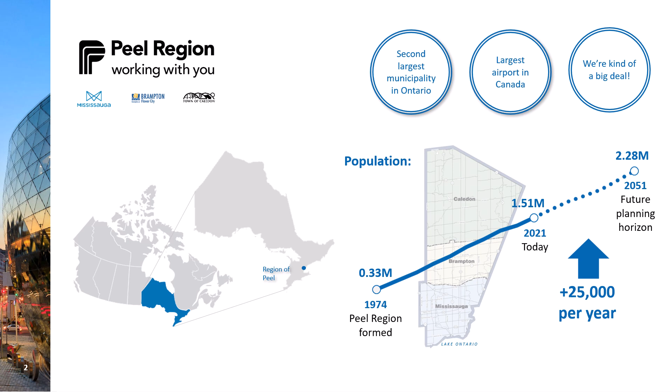This presentation looks at some trends and insights gained from monitoring wastewater within the sewer network. This study was performed within Peel region. This is an upper-tier municipality encompassing 3 cities, Brampton, Caledon, and Mississauga, for a total population of 1.5 million people. Our famous neighbor immediately to the east is the city of Toronto.

The presentation has 3 parts: introduction to sewers and sewer monitoring, a review of trends and insights, and it concludes with the next steps.

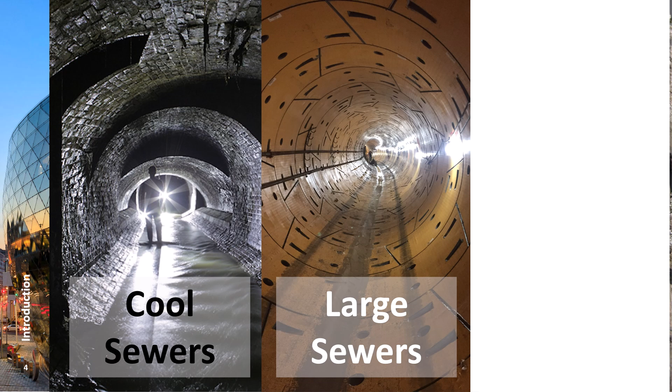There are cool sewers that you see in the cartoons and Walt Disney movies. Then there are really large sewers like the one in the middle of the screen. But the truth is that most sewers are small and unglorified. If there's one thing that you take away from the presentation, it is that for the sake of sewage heat recovery, only large sewers count, not the rest. And large means anything bigger than 650 millimeters in diameter.

Sewer networks are very much like a tree, where your home is just a leaf connected to a small branch. Small branches come together and make bigger branches that lead to the trunk. Sewers are just like the branches. They change in size, and the bigger ones are referred to as the trunk. Sewers are also like one-way streets. Flow only goes downhill, or at least that's the intention.

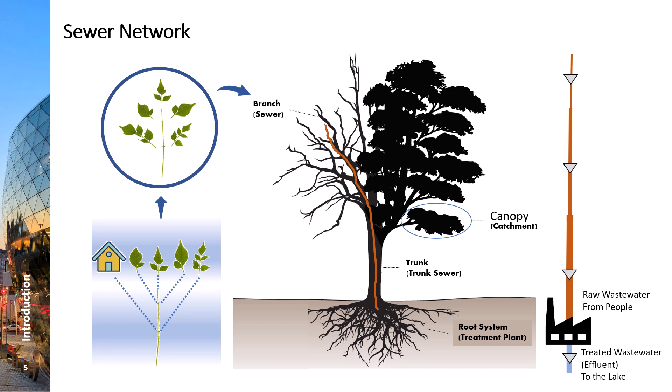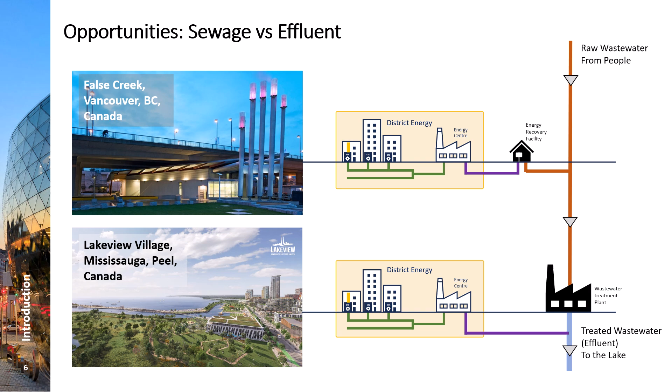We are monitoring depth, velocity, flow rate, as well as temperature of sewage within our network at over 400 locations. This involves descending into the sewer and installing equipment, and then maintaining it on a regular basis. This is quite a shit show, quite literally. Things break all the time and go wrong all the time. That's why this initiative, the monitoring, costs more than $4 million every year. However, the data collected enables us to operate the network very efficiently. We use it for all different purposes.

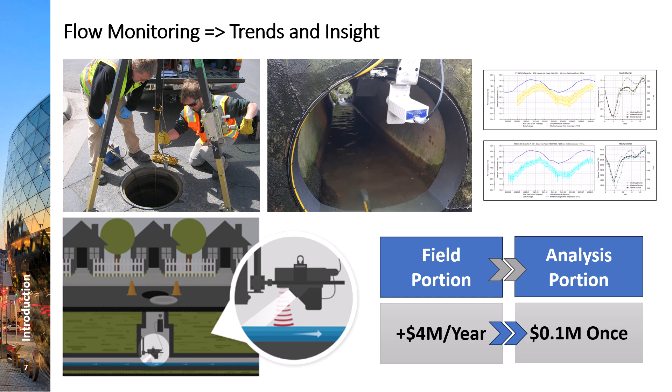All I'm going to explain on the temperature side of analyzing the data has been done 100 times over for other parameters. This is our first attempt at looking at the temperature side. This study isn't the expensive part, it's the monitoring portion that is very hard and costly.

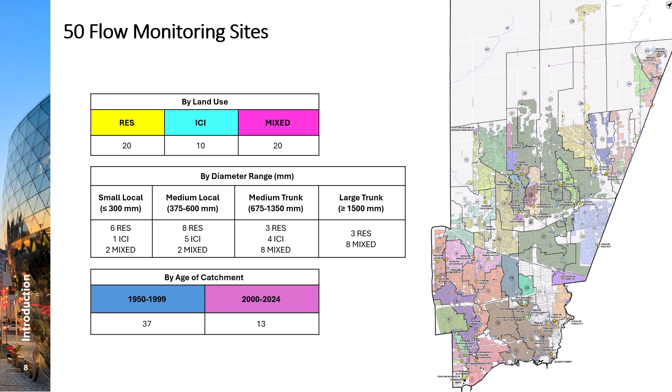50 monitoring locations were selected for this study. Care was given to pick locations from different land uses, different pipe sizes, and different vintage ages. This allows us to slice the data by, for example, land type, and then see if there's a correlation between residential neighborhoods and the size of the pipe, and so on.

It is evident that this type of work requires professionals who are both very smart and dedicated. Kristen, Ashley, and Dave have done the work; I only dream of the project and they make it a reality. They deserve all the credit here.

The presentation has three parts: introduction to sewers and sewer monitoring, a review of trends and insights, and it concludes with the next steps.

The general approach to the study is intuitive. What may need a bit of explaining is the difference between dry and wet weather. As the name suggests, wet weather refers to data collected when there is precipitation like rain and snow. Wet weather activities make a difference in the flow regime inside the sewer, including its temperature. Given that no two storms are identical, storms shall be qualified, which makes the topic even more complex than it is. I'm going to spare you all such details and directly get to the point.

Though we have a long report that explains all the assumptions and underlying conditions, and it's very important to keep those in mind for those who want to dig in deeper, because statistics without a statement of the assumptions is a dangerous thing. Two completely contradictory conclusions can be drawn from the same data set, and that is not our intention.

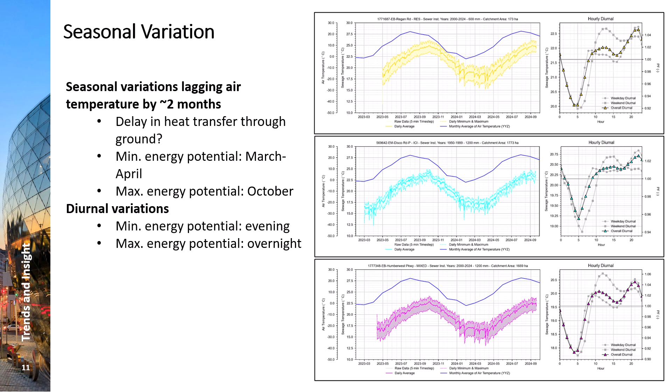First trend is seasonal variability. A consistent 2 months lag is evident between change in air temperature, shown with the blue line, and the flow temperature. The three charts showing monitoring data are from residential, ICI, and mixed land use types from top to bottom.

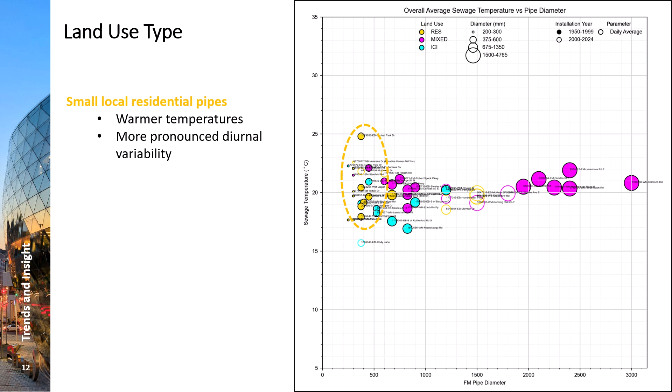Small pipes tend to carry warmer sewage, but their high and low over a given day is really far apart. ICI has a tighter variation, but the overall flow is a bit colder, and the mixed areas, which often are on larger trunks servicing a big area, are the most stable. The temperature seems to be stabilizing around 20 degrees and does not vary between the times of the day, and the size of the sewer does not make as much of a difference.

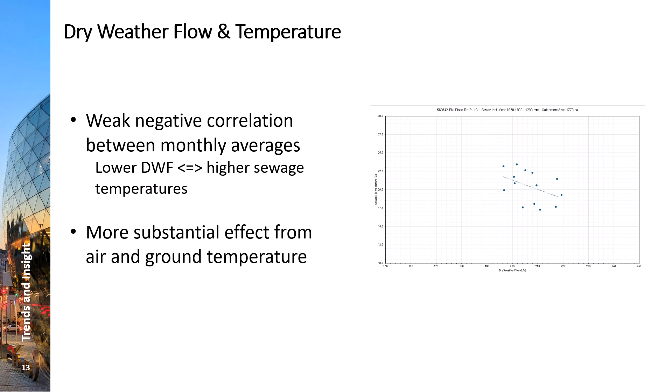There seems to be a weak negative correlation between amount of dry weather flow and its temperature. Less flow means higher temperature.

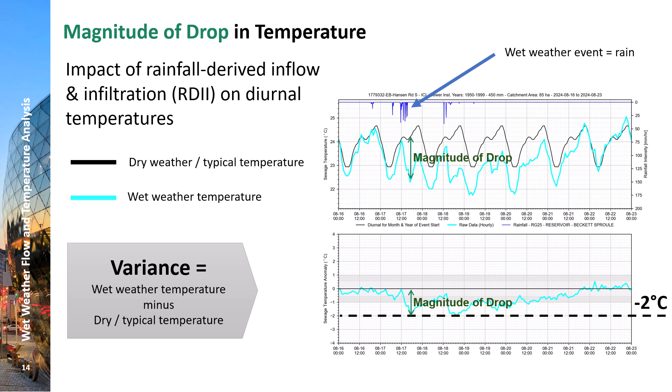The first one is magnitude of drop in temperature during the storm events, and it's highlighted in green on the slide. It is evident that the temperature drops by no more than 2 degrees in this example. Please note that the trends are based on analysis of multiple storm events and multiple monitoring stations. What is shown here is just one example for the sake of explaining the concept of variable and concept. A clear trend is observed here.

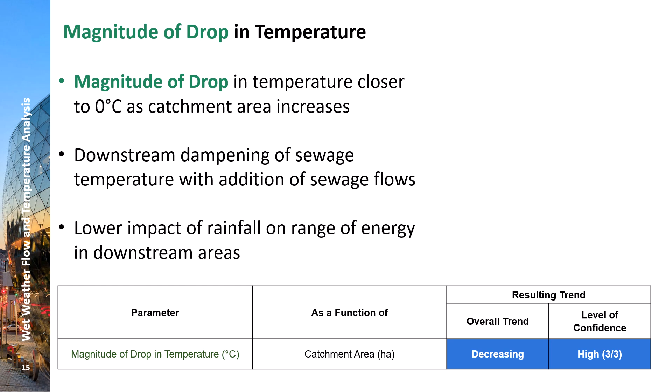As the catchment grows, the impact of rain on temperature is reduced. In other words, at the treatment plant, we see no change in temperature for most rain events happening upstream in the system.

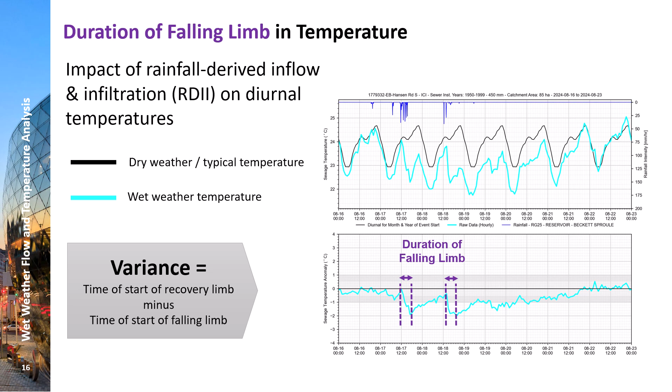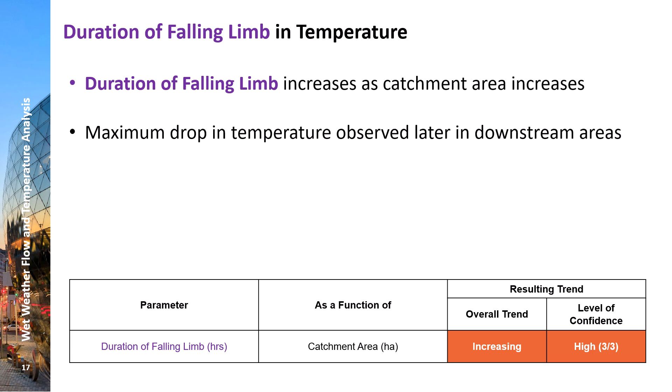Duration of the falling limb is defined as the time between start of falling limb, usually close to the start of the rainfall event, and the start of the recovery limb. There's a clear trend observed here. For smaller catchments, the variance drops quickly and deeper. For larger catchments, it drops slower and not as far.

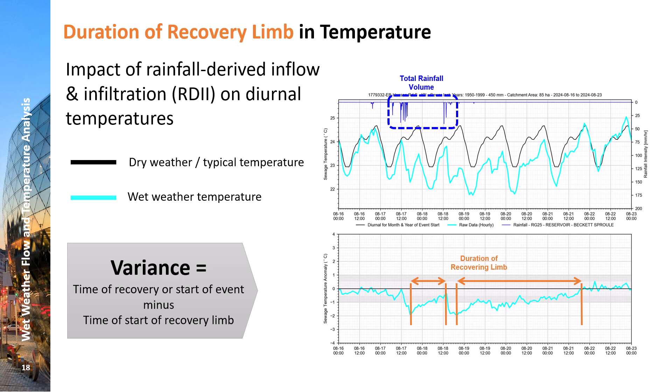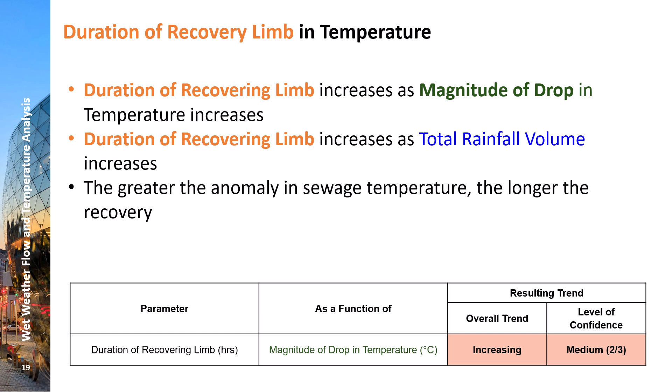Duration of recovery limb is between the start of recovery and end of recovery, or start of the next event, should that happen. There is a tangible trend here. It takes longer to recover if temperature has dropped significantly. Also, more rain means longer recovery period.

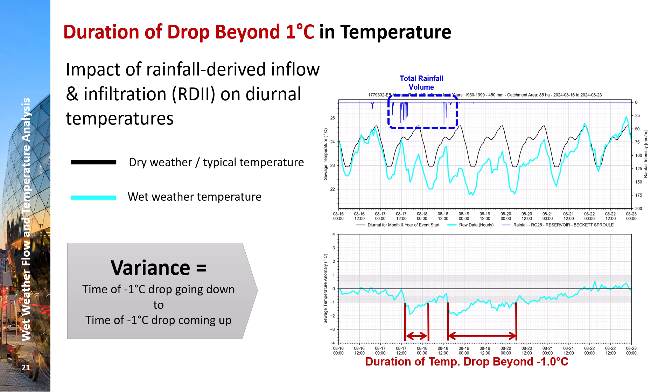The variance in question here is the length of time that drop in temperature remains more than half a degree Celsius. The same is also done for 1 degree. And the results are tabulated here along with everything else that we discussed and much more information. What I want to draw your attention to is at the bottom of the table regarding duration of temperature drop beyond 1 degree Celsius. You see that there is no trend observed here.

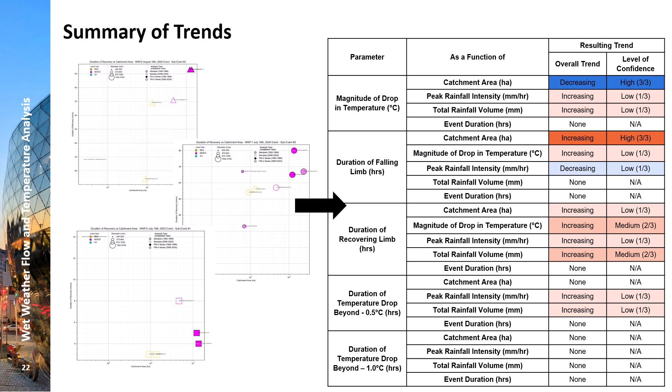And I want to emphasize that this is just as significant as some of the other more strong correlations. It means that we cannot blindly extrapolate from some observations to deduce information on the other ones. It also suggests that there may be other control measures that we have not considered and we should consider in our future studies. One takeaway that I can leave you with is that size matters when it comes to this topic. Size means more stability on various fronts.

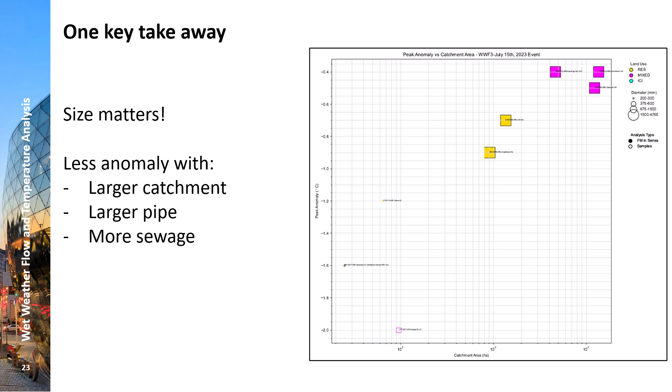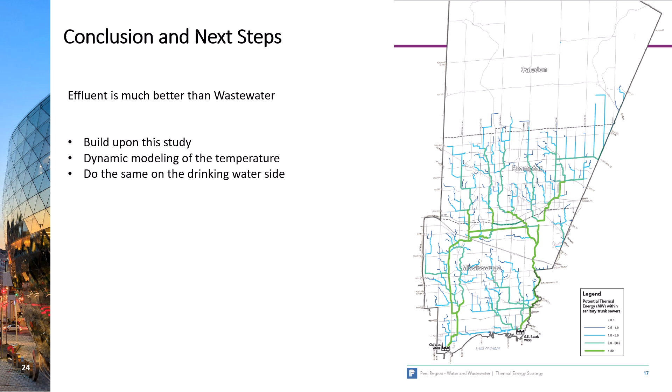We're also building a dynamic model of sewage temperature, not just a static model that is common, a dynamic one to better understand the network. And we are going to do all of this for the water network as well, so stay tuned.

The presentation has 3 parts: introduction to sewers and sewer monitoring, a review of trends and insights, and it concludes with the next steps. Thank you very much.